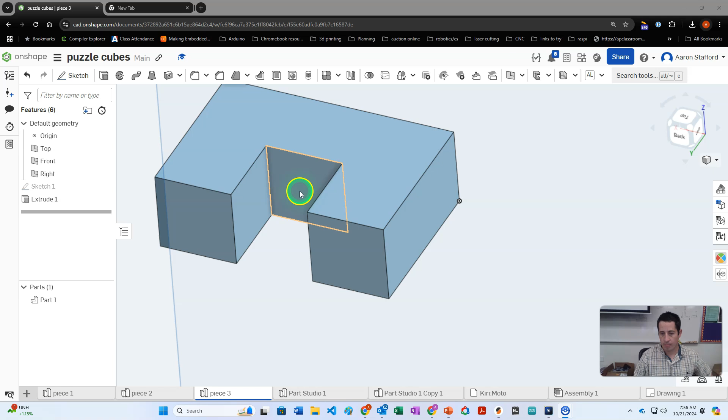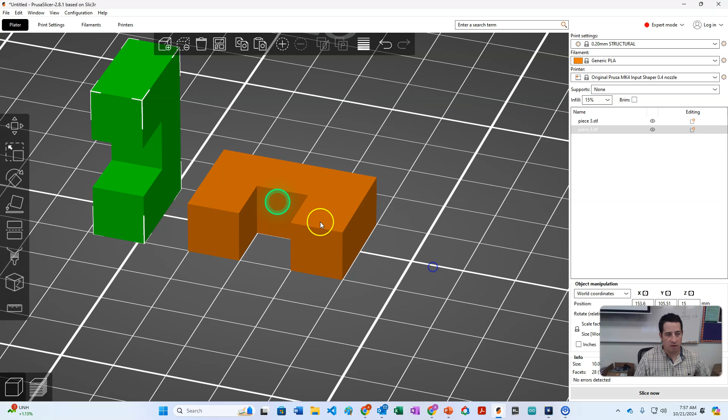As we wrap up these puzzle cubes and get ready to print them, we need to think about some of the limitations of the method we're using for manufacturing. Obviously you wouldn't print something like this, but one thing we want to pay attention to is the effect these layer lines have on our pieces.

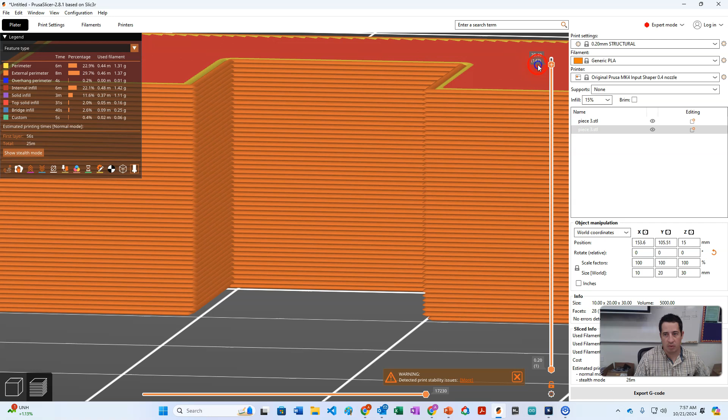We're using 0.2 millimeter layer height here, but if we zoom in we can see all these layers. If you're using 0.2 millimeter layer height, things work out evenly into 30, so you have 150 layers here, but there's a bit of a limit on your sizes of things. You can get more precise sizes going into lower layer heights.

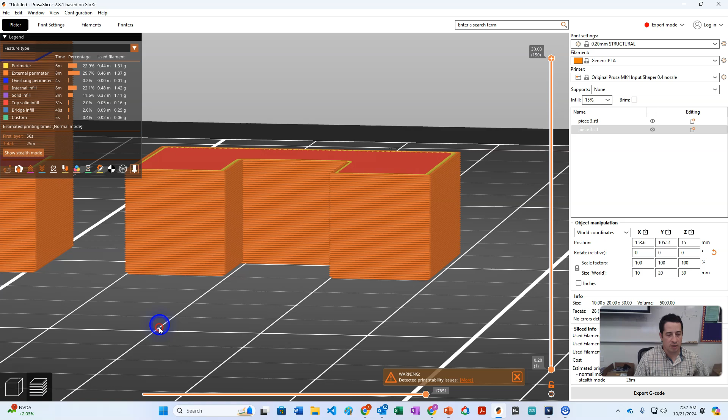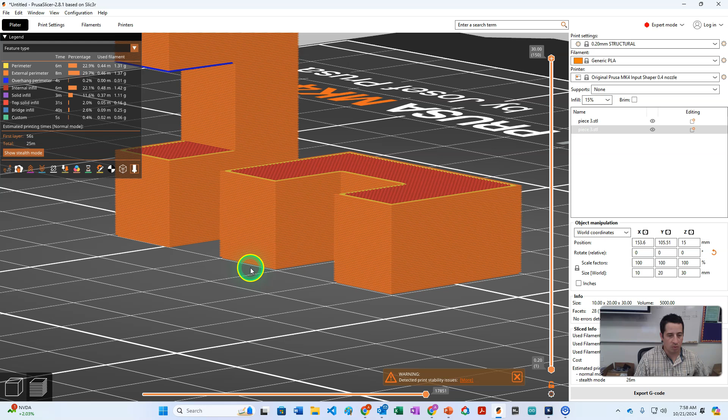But because these aren't perfect, sometimes things get a little bit bigger or a little bit smaller, and the direction of these layers will actually have an effect on the size of this thing when it's done. So putting it like this versus like this, the height of that block might be a little bit different for this one versus this one, even though they're the same faces.

This is going to be a challenge for us when we print these, because some puzzle pieces will be oriented different ways and their size will end up being different. So the way we're going to account for that is by doing a couple things. The first thing is we want to make sure we can identify the interior faces on our parts.

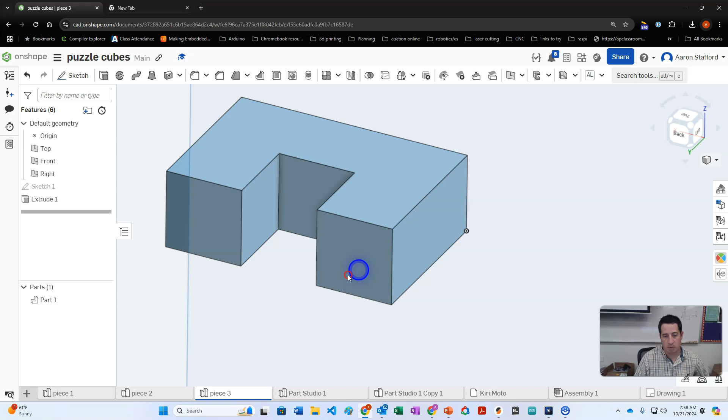So what we're going to do is give each puzzle piece a different color. We're going to edit the appearance, and we'll make this one be red. Then, for faces that are interior faces, let's say this is the outside, I'm going to select all my interior faces.

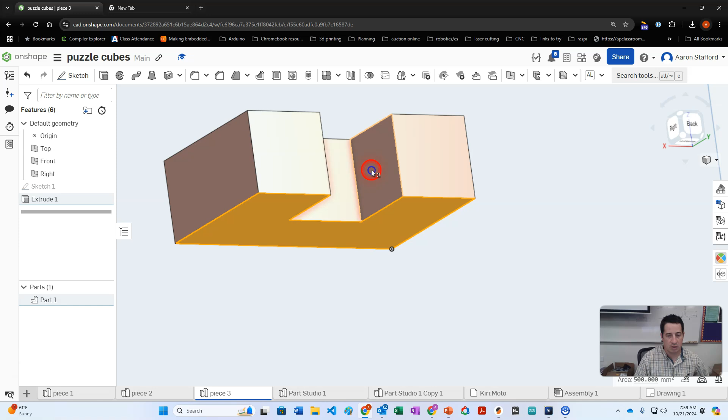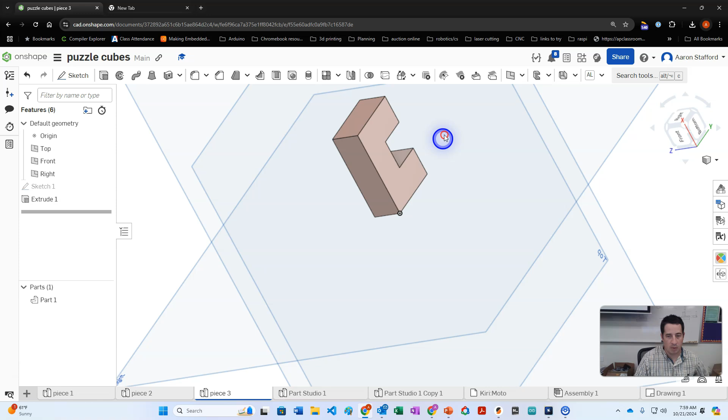I'm going to right click, say edit appearance, or add appearance to 7 faces, and go a slightly different shade here. Maybe we should make that a little more dramatic, so let's go to edit appearance for the parts and go a little bit darker. There we go, now we can see we have a different shade for the exterior and the interior faces.

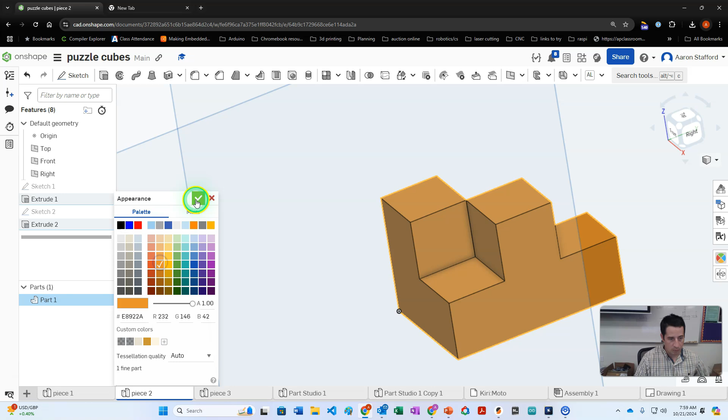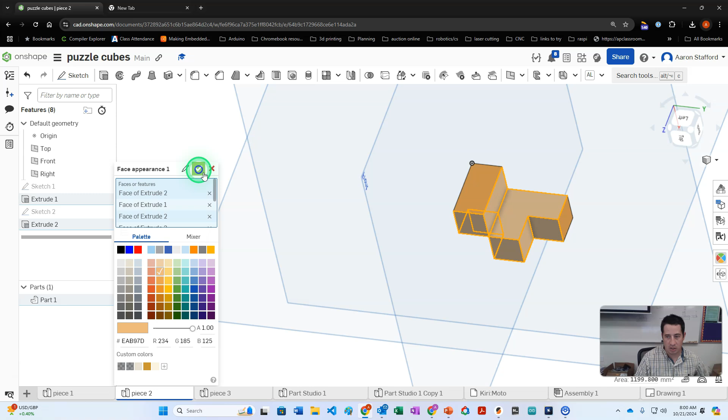And we should do this for each part, each part will have its own appearance. So we'll go for this one, this color, and then we're going to come in and select all of our interior faces and make them that lighter shade. I'm going to come into here, edit appearance or add appearance to 8 faces, and we'll go to that lighter shade.

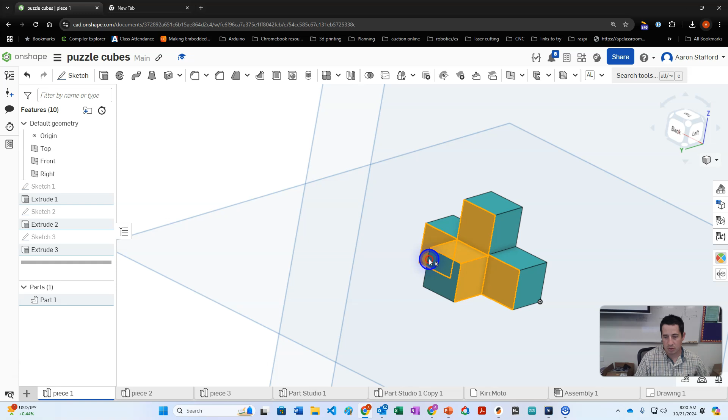Then we want to do that for all of our parts. So this one maybe I'll go with, let's add the appearance here, edit appearance, we'll make this one blue, kind of a turquoise color, and we'll do the same thing, get those interior faces, add appearance to 10 faces, and go just a little bit lighter there. Perfect, so now we've got the darker on the outside, light on the inside.

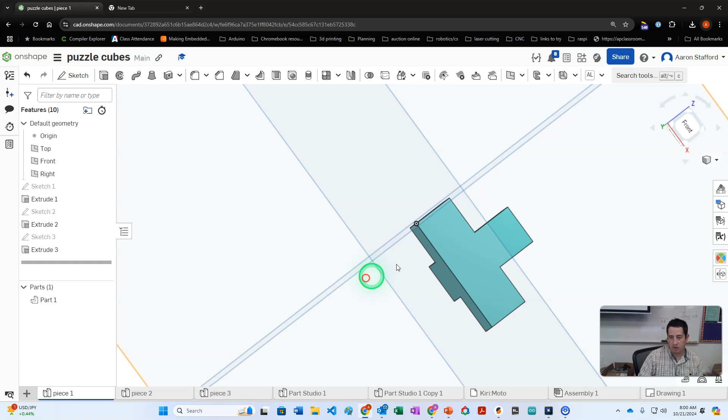So there's two reasons why we did this. The first is if we're going to add some decoration to the outside, then we want to know which ones are the outside faces. And this one I should maybe go a little darker just so it's a little more visible.

Let's go a little more shade. There we go. But also, the second thing is we actually want to make an adjustment to these faces.

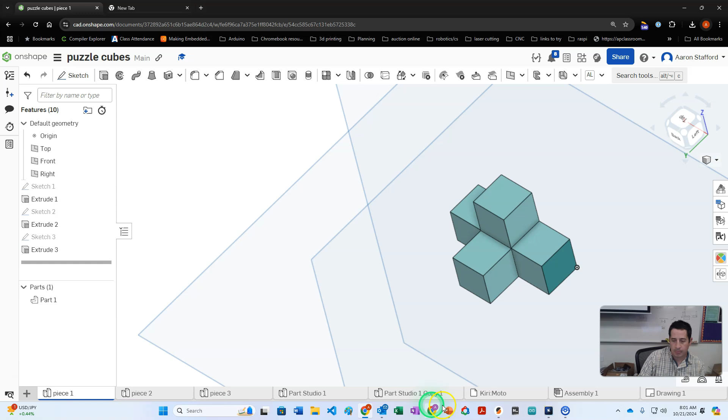Coming back to here, if these things could end up being a little bit bigger than we expect them, or maybe these openings get a little bit tighter, or if something needs to slot into here, it's going to end up being too big. And so we're going to offset these interior faces.

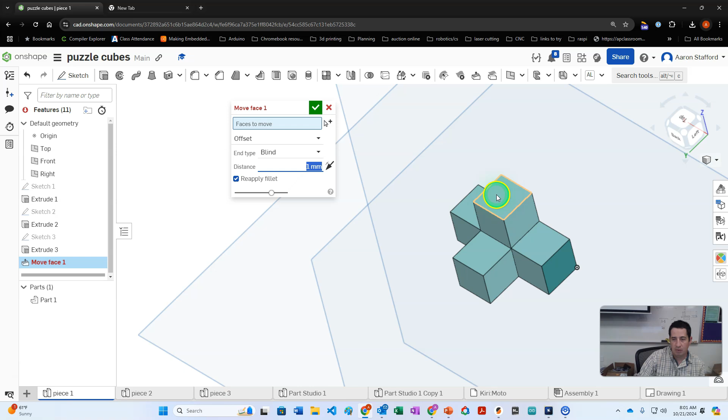So you want to select this Move Face tool. Let's change this to be 1 instead of 5, just to get started. And then we're going to click every single interior face.

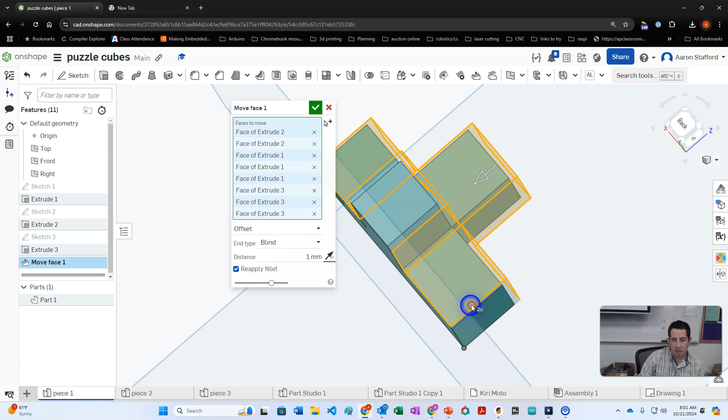We want to go through, and we've got all those lighter shaded faces. We want to make sure they're all selected. Then we want to change this offset to go in like that, and instead of being an offset of 1, we want to set it to be, actually we're going to create a variable. So we're going to type pound offset, then select new variable, and we're going to set our offset to be 0.1 millimeters. And then we're going to click the check mark.

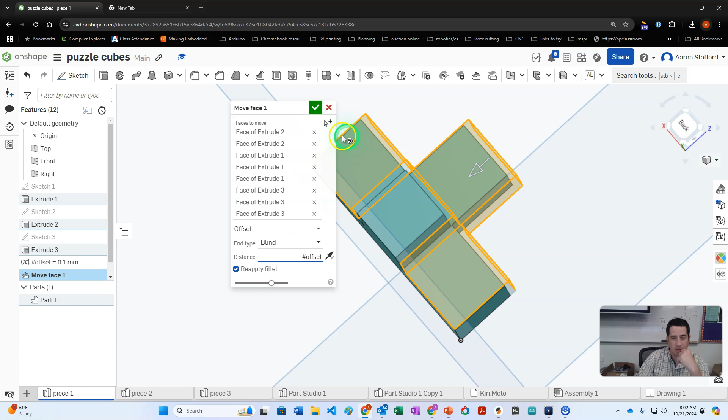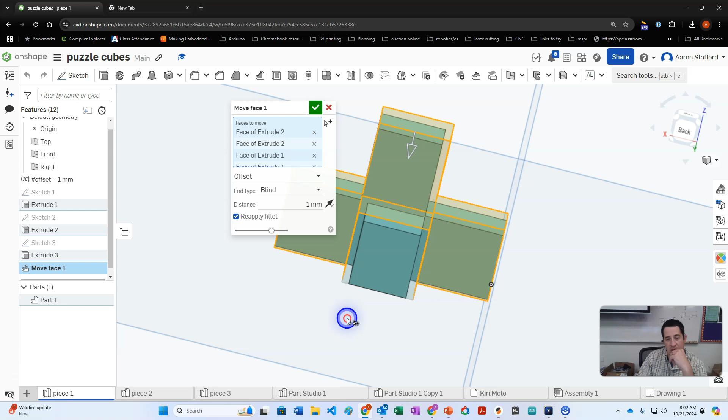So we have this variable here. We can change it. So if I want my offset to be 1 millimeter, it's going to shave off a whole bunch more. Oh, you can see I missed a face there. Let's see. No, looks like I got them all. I missed this one right here. There we go. So you can use that to check that you got all your interior faces.

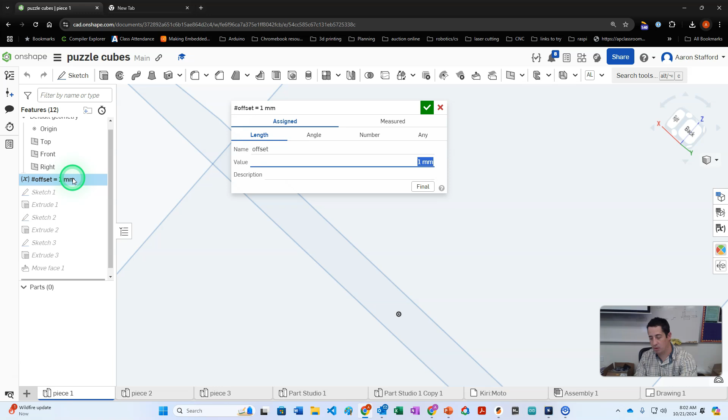So let's move it back to 0.1. And what this is going to do is we're just going to shave a little bit off of these pieces that go on the inside to give them a little bit more room to fit together and to slide together. And we're going to do this for each piece.

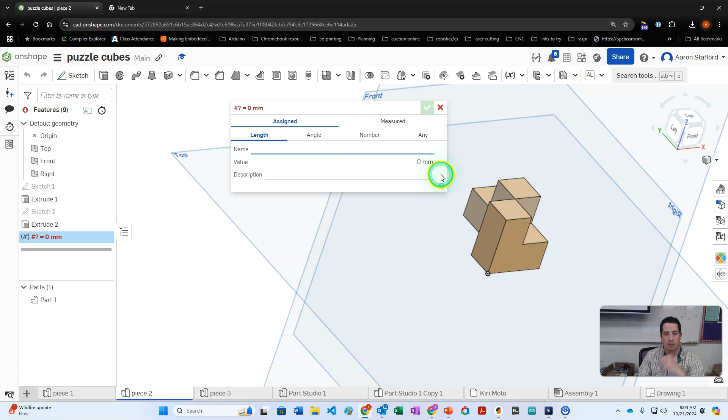So again, we're going to choose this one. Let's start with the variable first here. So we're going to go to here. We're going to create a variable called offset. We're going to set it to be 0.1. And then I'm just going to drag it to the top there.

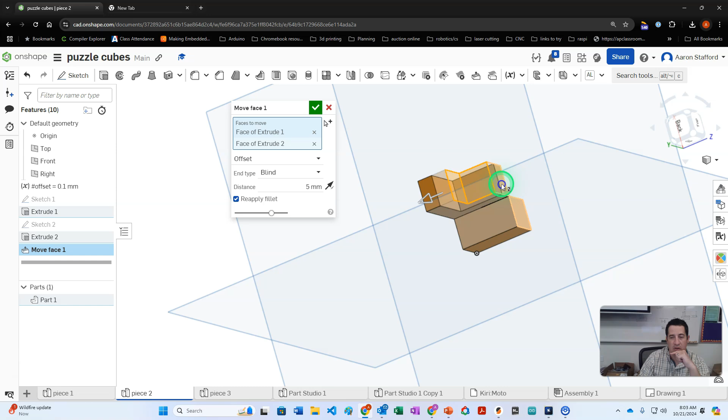And now I'm going to do the move face command. So move face. I'm going to select all those interior faces that we can see shaded differently. And set this to 1 here.

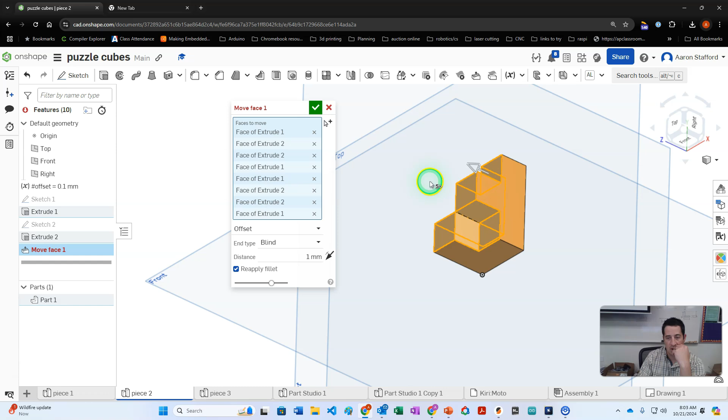Alright, and then we might have to break this one up into 2. I'm going to come inward. There we go. Oh, that worked.

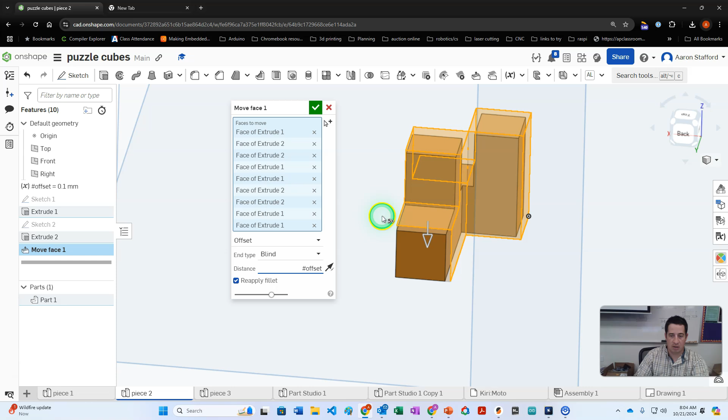And we want to set this to be, so I think technically this should be an interior face as well. Let's set that to be our offset. So we're going to do pound, and then select offset. And there we've added our offset there.

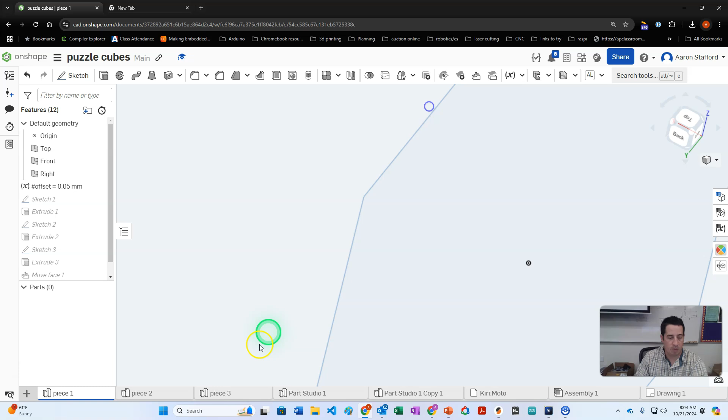And you can see there's a little bit of a gap there because that offset, maybe we go back and do a little bit smaller. Let's start with 0.05. And so you can go back and make this one 0.05. And then as you print them, if they don't quite fit, we can make that a little bit bigger of an offset.

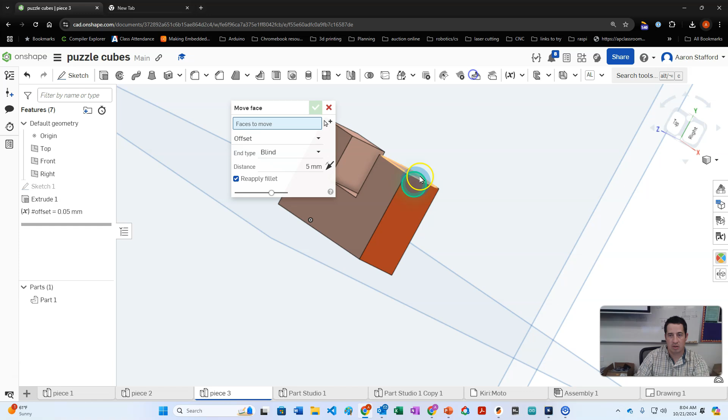Okay, same thing here. We're going to go create our variable, call it offset, set it to 0.05, and we'll go ahead and do move face. Move face, this one, this one, this one, that one, that one, and that top one. Set it to offset.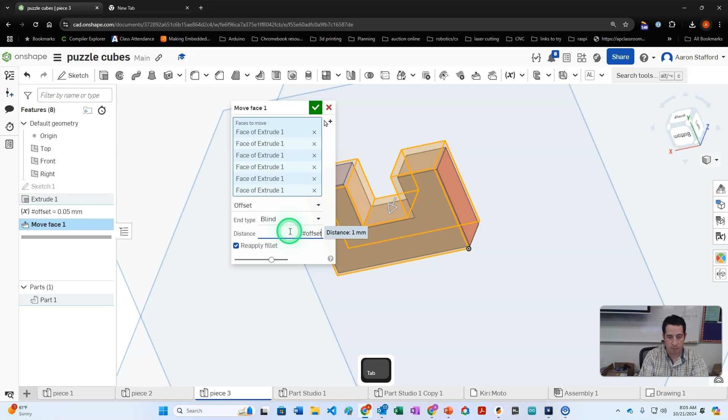Okay, that's good. Have it come in like that, and we'll set it to be our offset. And so we're going to go through that and do that with all of our faces, not all of them, just the interior faces, and that way we'll make sure that we have those offsets there so it will print nicely, or it will fit together nicely after we print it.